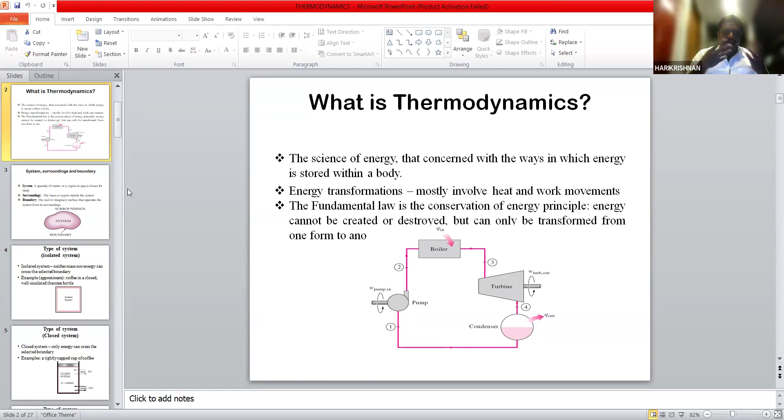The next thing I taught you last class is system, surrounding, and boundary. When studying a thermodynamic problem, the first thing you have to know is the system, which is the quantity of matter chosen for study. Outside the system is known as surroundings, and the system and surrounding are separated by an imaginary surface which is known as the boundary. It can be real or imaginary. This is what we studied about system, surroundings, and boundary.

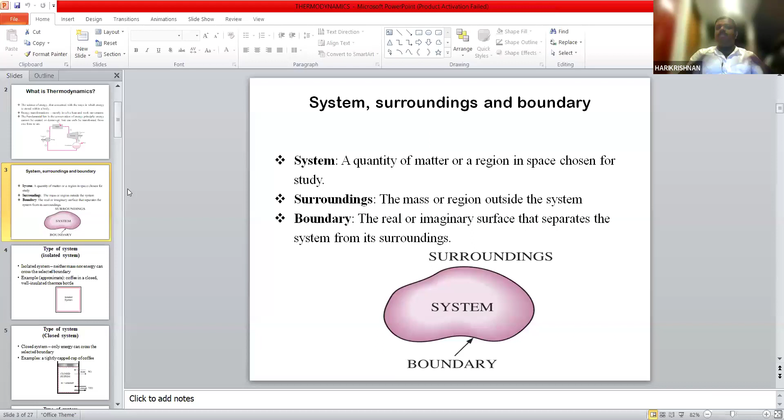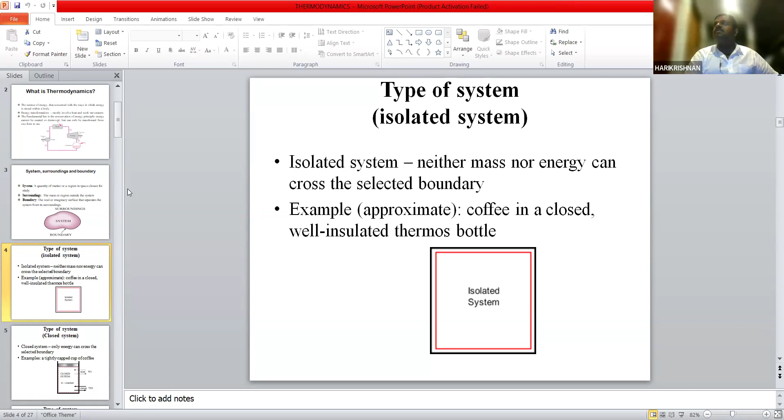Then we studied that an isolated system will not transfer any mass or energy to the atmosphere around the body. That type of system is known as isolated system. For example, a thermoflask is an example of an isolated system.

Then the next is closed system. In a closed system, energy can cross the selected boundary. For example, if you are keeping coffee in a tightly capped cup, what happens? Energy will cross the boundary. The amount of coffee will stay the same, but the hotness of the coffee may reduce over time. That is known as a closed system.

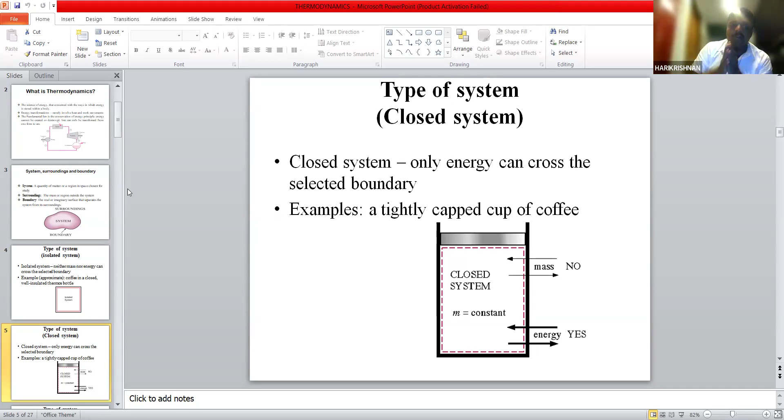But in an isolated system, that will not happen. Whatever heat and energy is there, it will remain in the system itself. That type of system is known as isolated system. Closed system means energy can cross the selected boundary. Open system means both energy and mass transfer will happen. These are the basic things we studied in the last class.

Then we studied the properties of the system. The properties are classified into two types: intensive property and extensive property. Properties which are independent of the mass are known as intensive property, and those which vary directly with mass are known as extensive property. Examples of intensive property are temperature, pressure, and density. Examples of extensive property, which vary directly with mass, are mass, volume, energy, and enthalpy. These are the things we discussed in the last class.

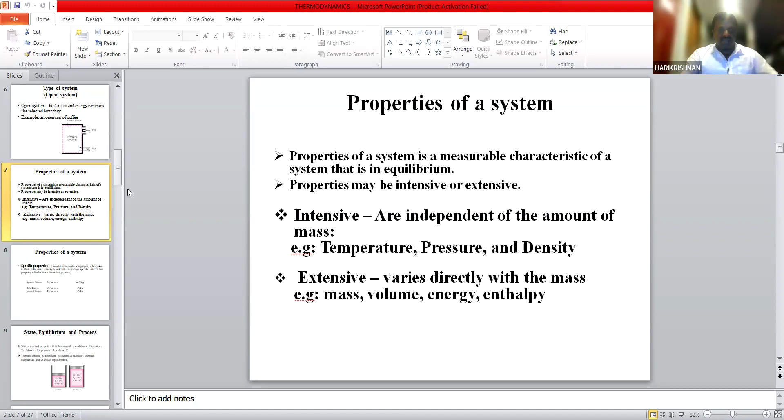Then we moved on to specific properties. Specific property means the ratio of any extensive property of a system to its mass gives you the specific property.

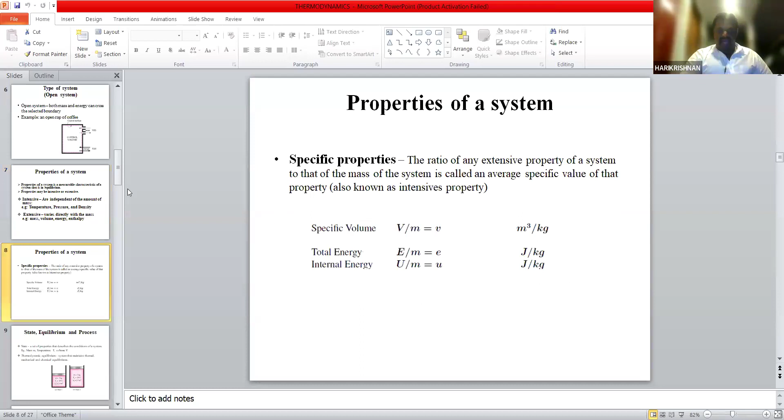State, equilibrium, and process - that is what equilibrium means. I have told you in the last class, there are three types of equilibrium: thermal, mechanical, and chemical. A body is in equilibrium only when it obeys all three of these equilibrium conditions.

Mechanical equilibrium means when a system is in equilibrium, it will not apply or have any external force acting on it. Chemical equilibrium means there will not be any chemical reaction happening. Thermal equilibrium means there will not be any temperature change. So a system in equilibrium must satisfy all three: thermal, chemical, and mechanical equilibrium.

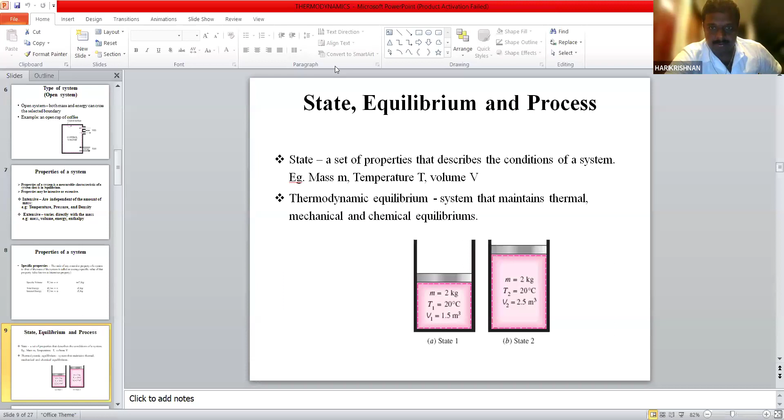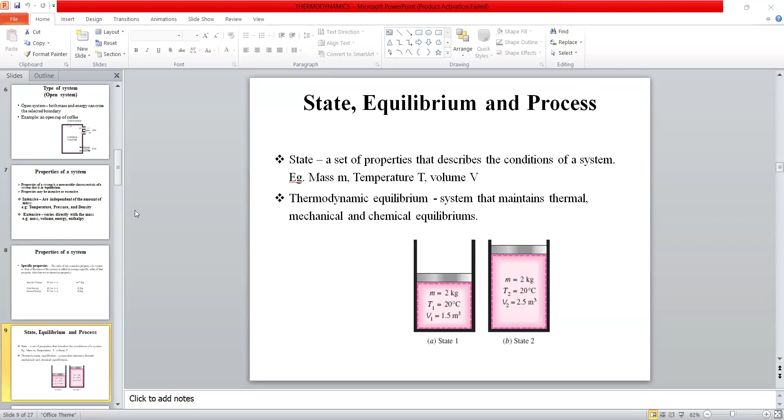Then we studied types of thermodynamic process. One is cyclic process - when a system starts from an initial state, undergoes various processes, and finally returns to its initial state, that process is known as cyclic process. For example, if it starts from state 1, passes through different processes like 1 to 2, and again comes back to 1 where the process stops, that type of process is known as cyclic process.

Reversible process means any process which can be reversed - that type of system is known as reversible process. Irreversible process means we cannot reverse a process; it will happen only on one side and we cannot reverse it. That type of process is known as irreversible process.

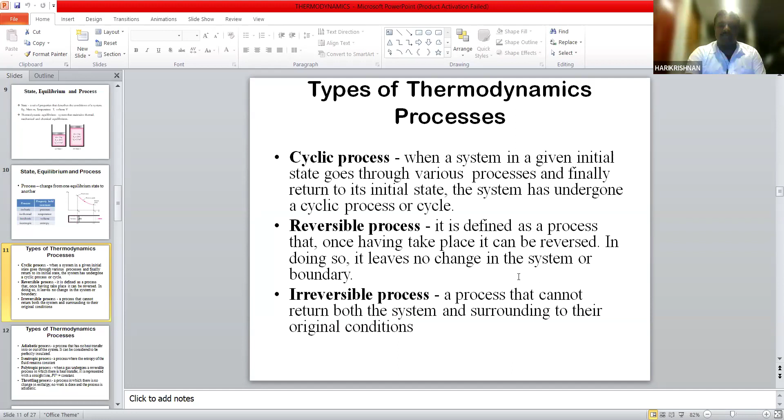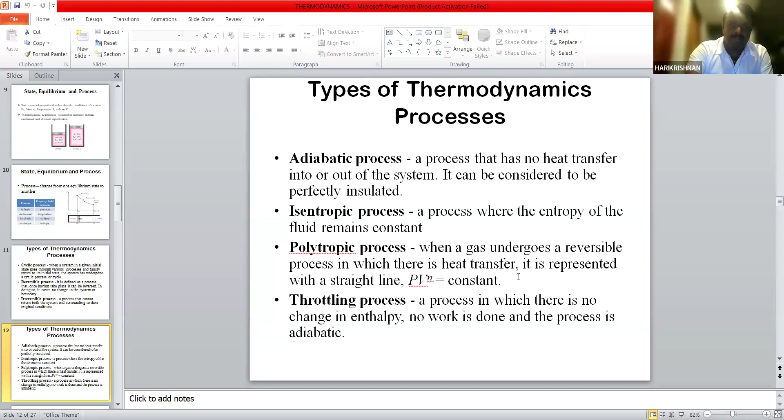Then we have studied process, and thermodynamic equilibrium I already explained. Then the next thing you have studied is the laws of thermodynamics. In the last class I explained up to the first law of thermodynamics.

So let me tell you what I mean by zeroth law. Zeroth law is the basic law of thermodynamics whose application is used to find the temperature - the thermometer is an example for the zeroth law of thermodynamics. The law states that when two bodies are each in thermal equilibrium with a third body, they also remain in thermal equilibrium with each other.

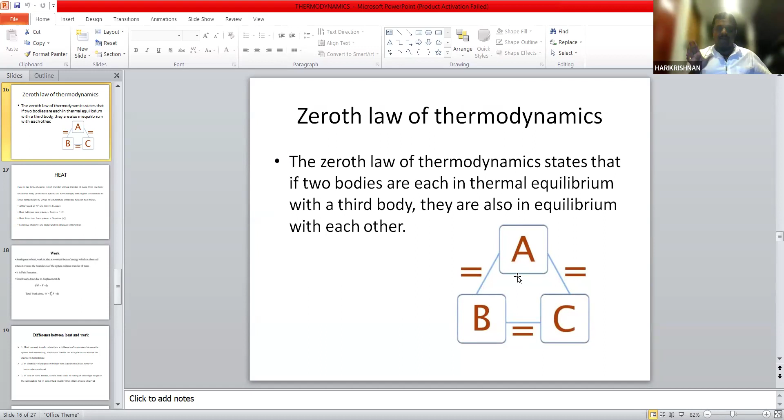For example, A and B are in thermal equilibrium, then B and C are in thermal equilibrium, then A and C will be in thermal equilibrium. This was the basics for temperature measurement - the zeroth law of thermodynamics gives the basic idea for measurement of temperature. This we studied in the last class.

Then first law of thermodynamics. Basically the first law states energy conservation - that energy can neither be created nor destroyed, but it can be changed from one form to another. That was the basics of the first law of thermodynamics, also known as the law of conservation of energy.

We can see that when it is applied to a cyclic process, the cyclic integral of delta Q minus delta W is equal to 0, which gives the idea of the first law of thermodynamics. Up to this we studied in the last class - that is the first law of thermodynamics.

Now today we are going to study that thermodynamics has two more laws - one is the second law of thermodynamics and another is the third law of thermodynamics. The second law of thermodynamics has two statements: one is the Kelvin-Planck statement and another is the Clausius statement. The specialty of this second law is that heat engines, for example, work with the help of it - for example the Carnot cycle. Every cycle we study is based on the second law of thermodynamics.

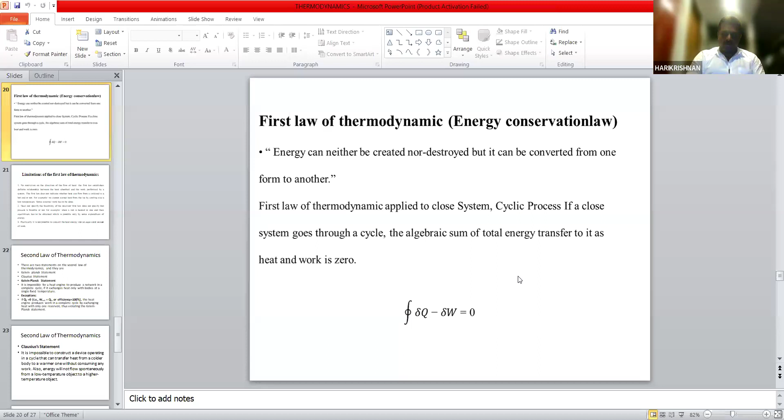So we will be starting from the second law of thermodynamics. There are two statements: one is the Kelvin-Planck statement and another is the Clausius statement. I will read this statement, and after that I have got another PPT through which I will explain all these things.

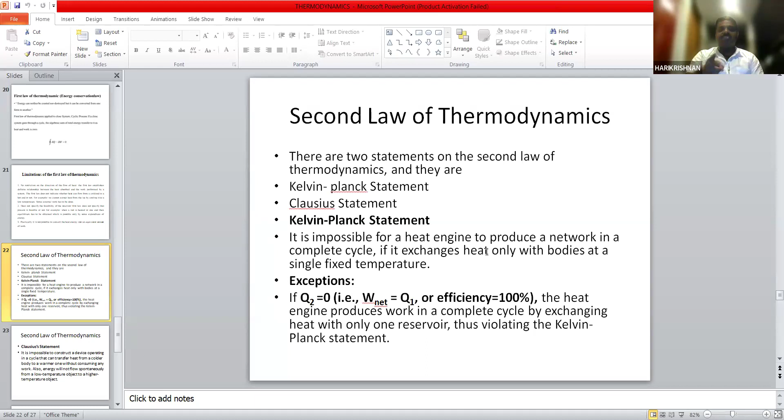The first statement is that it is impossible for a heat engine to produce net work in a complete cycle if it exchanges heat only with bodies at a single fixed temperature. That means the simple basic idea is that for an engine to work, it has got two temperatures - that is the basics of this Kelvin-Planck statement, which I will explain.

I will explain everything. Next is the Clausius statement. The Clausius statement states that it is impossible to construct a device operating in a cycle that can transfer heat from a colder body to a warmer one without consuming any work.

Energy will not flow spontaneously from a low temperature object to a higher temperature object. That means we cannot transfer energy from a low temperature reservoir to a high temperature reservoir unless we apply some work. For example, energy can transfer from a high temperature body to a low temperature body without any application of work, because of the temperature difference. But to transfer energy from low temperature to higher temperature, we cannot do that without applying work.

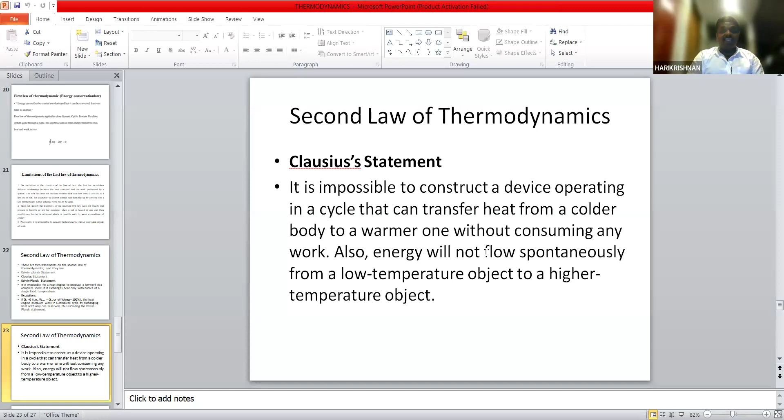This is the basics of the Clausius statement. So these are the two statements. Now I may be using some other PPT for explaining all these things: what is the second law, what do you mean by Clausius statement, Kelvin-Planck statement, and what is the functionality of all these. Let me close this PPT first.

Now another PPT is visible to you. So the zeroth and first law are very simple to explain. The zeroth law states that if there are three bodies, and 1 and 2 are in thermal equilibrium, and 2 and 3 are in thermal equilibrium, then 1 and 3 will also be in thermal equilibrium. Also, the first law of thermodynamics is the law of conservation of energy. These are two very simple statements.

But when it comes to the second law of thermodynamics, there are some more aspects we are explaining with the help of these two laws. The first thing is that it identifies the direction of a process. That is the first important thing in the second law of thermodynamics.

For example, heat: what happens if you keep a hot tea open to the atmosphere? Heat will transfer from the hot tea to the atmosphere. Why does this happen? It happens spontaneously, because there is a temperature difference. So heat will spontaneously transfer from a hot object to a cold object. But if there is no temperature difference, the vice versa is very difficult—it is very difficult to transfer heat from a cold object to a hot object without the application of work.

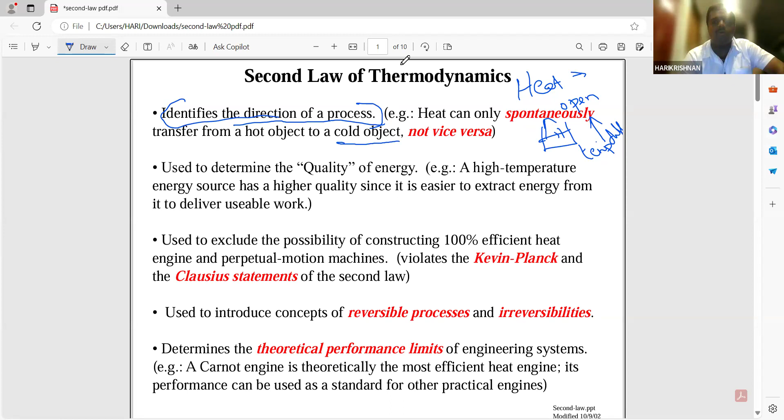That is what is meant by identifying the direction of a process: heat can spontaneously transfer from a hot body to a cold body because of the temperature difference. That is the first importance of the second law of thermodynamics.

Next, the second law is used to determine the quality of energy. Quality means: if an energy source has a high temperature, it is said to have higher quality, because it is easier to extract energy from it and deliver it as useful work. A high temperature energy source has high quality, so it's easier to extract and convert that energy into useful work.

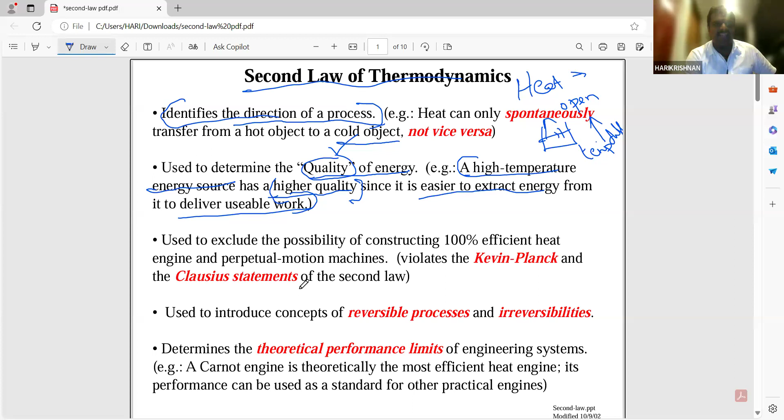Then next is the possibility of constructing a 100% efficient heat engine and perpetual motion machines. I have already told you about the Kelvin-Planck and Clausius statements. So what is the specialty of a 100% efficient engine? You may know it—it will have no losses.

But when you consider your vehicle, for example your bike, what is the specialty of this bike? It has so many moving mechanical parts. We also provide lubrication—why? Lubrication is provided to reduce friction. So what does that mean? There is already a friction aspect in the engine. Friction means whatever work or energy we give will not be fully converted into work; some will be lost due to friction. So it means it will not be possible to construct a 100% efficient engine.

We are saying that Carnot is a 100% efficient engine, but it is not possible because losses are there. That is what the third point explains: used to exclude the possibility of constructing a 100% efficient heat engine and perpetual motion machine.

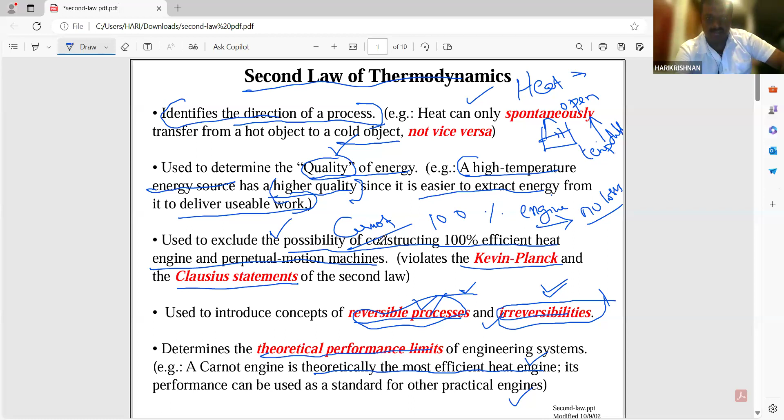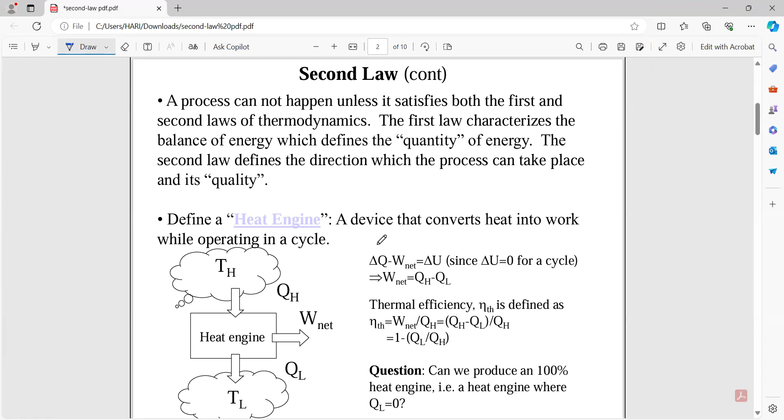Next is second law, the continuation. So you may see this figure. This is a heat engine. There is TH and there is TL. What is TH? Hot body, and TL is the cold body.

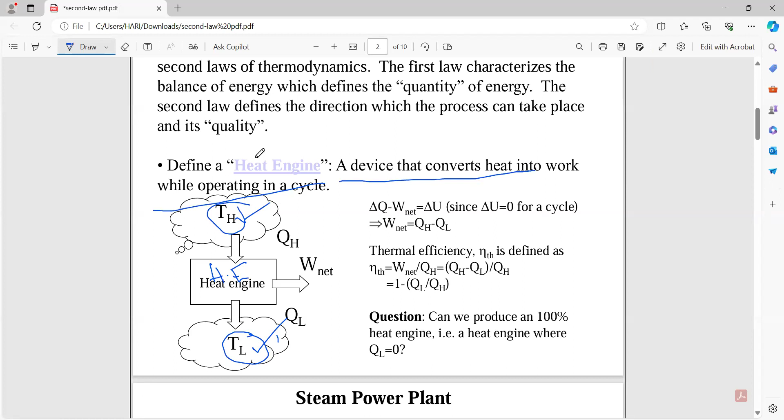The device that converts heat into work while operating in a cycle is known as a heat engine. What is the specialty of a heat engine? It is a device which converts heat into work while operating in a cycle. That is known as heat engine.

You can see over here, this is the hot body and this is the cold body. So the heat engine is doing work. That work is termed as W net. W net is QH, heat from the hot body, minus QL, heat to the cold body. That is W net, which is work done.

So work done: there is heat transfer QH to the system, and there is a heat loss from the system, that is QL. If this is a hot body and this is a cold body, there will be heat transfer from the hot body to the cold body. So from the hot body QH heat is transferred, and QL heat is transferred out. So work done is QH minus QL.

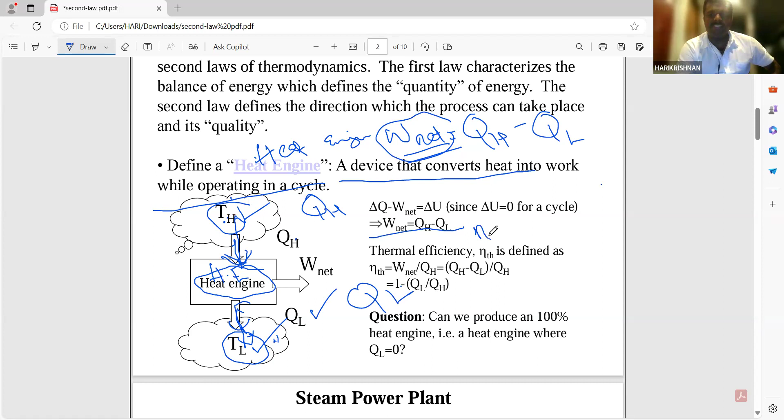So what will be the efficiency of the system? Work done, net work, divided by heat extracted, QH. What is work done? QH minus QL divided by QH. So when you divide it, you get 1 minus QL divided by QH. This is the efficiency.

So this is about the heat engine. You have to understand that in a heat engine, there is a hot body and below there is a cold body, with an engine connected in between. From the hot body, QH will be extracted and some work will be done by the heat engine, known as W net. After that work, heat goes to the cold body, that is QL.

So the net work done is QH minus QL. Efficiency is W net divided by heat extracted, that is QH. Using the W net equation, QH minus QL divided by QH, the efficiency is 1 minus QL divided by QH.

So we cannot produce a 100% efficient engine, as I told you in the beginning. Why? Because there will be heat losses in the system, heat losses or energy losses. This happens because of friction and other complications in the moving parts.

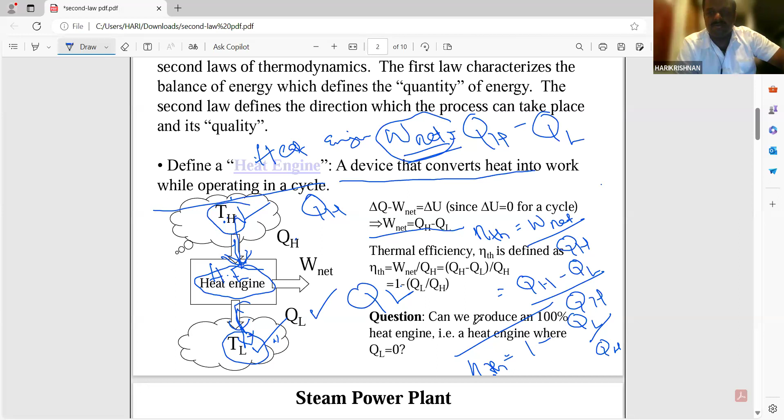Is it clear for you? I think this much is clear. Yes sir, yes. Okay. In doubt? Any questions? No sir, no. Okay, thank you.

So when we come to the power plant, we have already discussed heat engines. For a heat engine, the best example is a steam power plant. What is the specialty of a steam power plant? Actually, the main specialty is that it will be producing steam. What is the specialty of a steam power plant?

It will be producing steam. Then what is the reason for this heat engine? What is the working fluid in the steam power plant? Anybody, can you say? Some of you will be working in a steam power plant, so what will be the working fluid? It will be water. This water will be converted into steam when it undergoes some thermodynamic cycle. This steam power plant is a good example of heat engine where the working fluid is water, which undergoes a thermodynamic cycle.

In the last session itself, we have told you W net is equal to W out minus W in, also Q in minus Q out. That means, I will explain how it is coming.

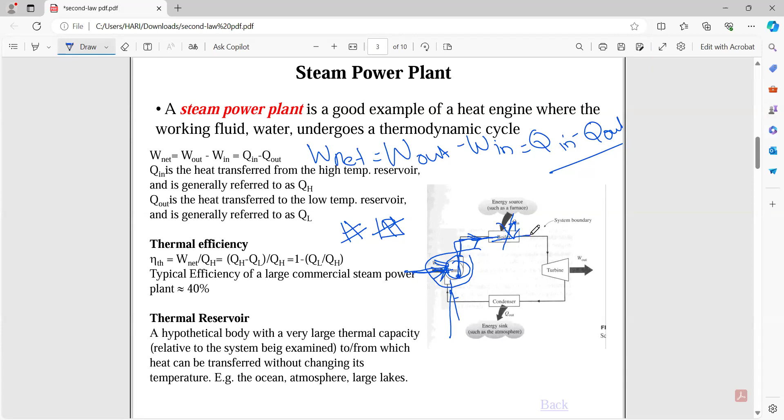In boiler, we will be applying heat. When we apply heat, the water will become steam. Is it clear? I think it's clear. So, after the steam is produced, the steam is used, turbine will be working, and this W...

Okay, sorry, there is rain over here. That is what, there is some issue. Sorry for that. The power is fluctuating due to rain.

So this is the working of a steam power plant. I think it's clear for you.

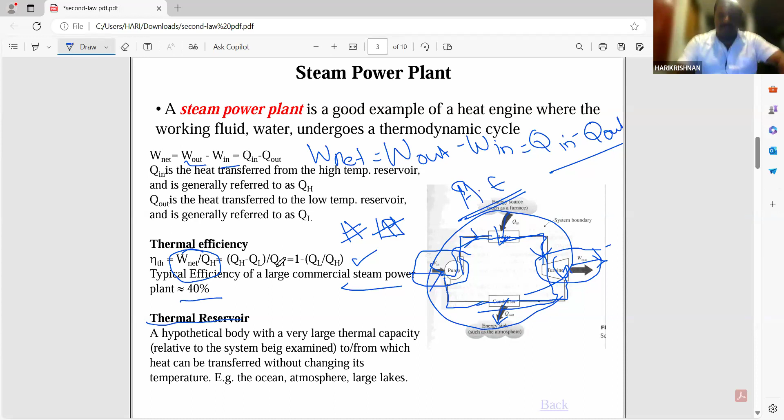Next, in the starting of the section, I have explained Kelvin Planck statement, but now you have got some idea about this heat engine, etc. Now I will be giving you what is Kelvin Planck statement.

It is impossible for any device that operates on a cycle to receive heat from a single reservoir and produce net work. For example, when we see a steam engine, there was a pump, a boiler, then a turbine, and again a condenser, again a pump. So if it is impossible for any device that operates on a cycle to receive heat from a single reservoir, here we are having different reservoirs, then only what happens - there is work. That is what the second law of thermodynamics, or the Kelvin Planck statement, is all about.

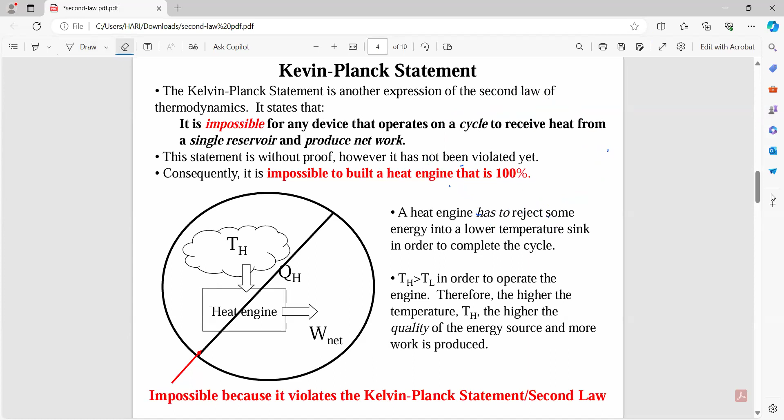So this statement is without proof. However, it has not been violated yet because it is impossible to build a heat engine that is 100% efficient. For example, what they have done is, there is a heat engine over here, you can see. We are applying, this is a hot body, and we are applying a Q to the heat engine. If total W net, whatever Q we supplied, it will be transferred to work, then it violates which law? Kelvin Planck statement.

Kelvin Planck statement says that if there is a hot body and you are transferring heat or energy to this heat engine, some will be transferred to work and some energy will be liberated to atmosphere or cold body, whatever it may be. So it will not be possible to work with a single engine or a single reservoir. There will be more reservoirs for energy transfer to happen. That means it is impossible to build a heat engine that is 100% efficient. That is the proof of Kelvin Planck statement.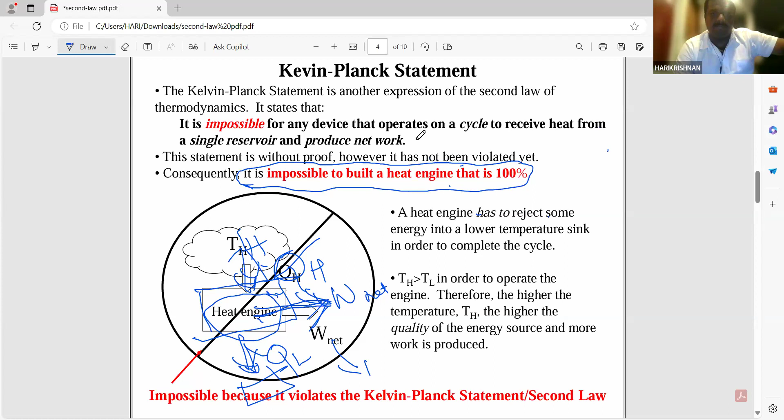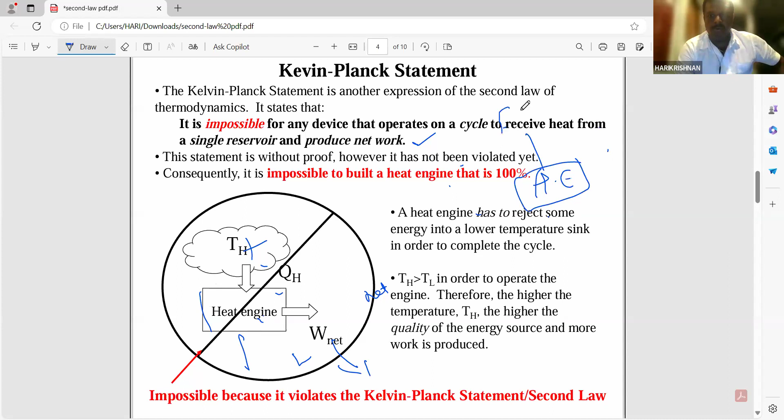So if we are having a heat engine, for example, if it is connected to a hot body here and this is cold body, then Q will be liberated from the hot body and some work will be done by the heat engine and some heat will be liberated to the cold body. This is the procedure of a heat engine. If this cold body is not there, it will become 100% efficient, but it is not possible. I think it's clear, Kelvin Planck statement.

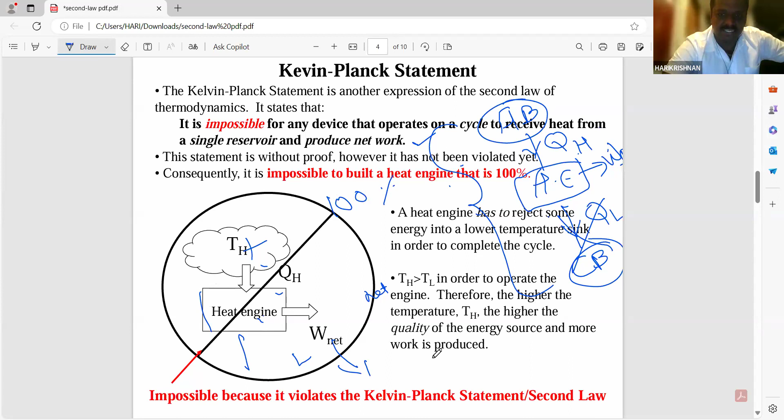Next is heat pump and refrigerator. These are the basic devices for heat transfer. What is the function of a heat pump? Heat pump is defined as a device that transfers heat from a lower temperature source to a higher temperature one. That is the specialty of heat pump. For example, heat pumps are used to extract energy from outside cold outdoor air into warm indoors.

But a refrigerator performs the same function. The difference between the two is that the heat transfer needs to be optimized. In a refrigerator, it will be cooling the air, that is the function of a refrigerator. But a heat pump will be heating the room. For example, when we use a heat pump in a room, it will be heating the room, while a refrigerator will be cooling the room. So both refrigerator and heat pump are examples of heat transfer devices, an application of the second law of thermodynamics. I think it's clear for you.

Next is heat pump or refrigerator. The specialty is that we have to do some work on the system, then only it will function. For example, if we are extracting heat from a cold body, we will be doing some work on it, then only it will be transferred to the hot body.

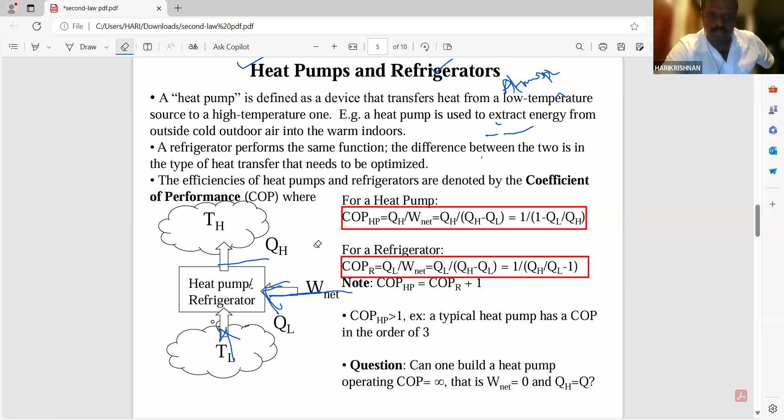So this refrigerator and heat pump relate to the Clausius statement. What do you mean by Clausius statement? It is impossible to construct a device that operates in a cycle and produces no effect other than transfer of heat from a lower temperature body to a higher temperature body. That means without the application of any work, we cannot transfer heat from a cold body to a hot body. But we can transfer heat from hot body to cold body directly, because of temperature difference. But we cannot transfer heat from a cold body to a hot body without any external work. That is the statement of Clausius.

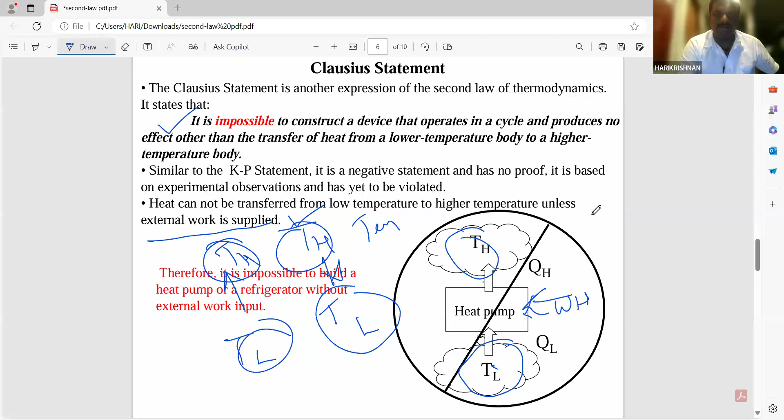Heat cannot transfer from a low temperature to a higher temperature unless external work is supplied. Whatever heat is there, if it is to be transferred from a low temperature body to a higher temperature body, some external work has to be applied. If you are building a refrigerator or heat pump, we have to give some external work input. Then only this refrigerator or heat pump will work; otherwise it will not work.

That is what Clausius statement gives you. Clausius statement states that it is impossible to construct a device that operates in a cycle and produces no effect other than transfer of heat from a lower temperature body to a higher temperature body. You have to be very specific with the statement.

So if you have to transfer heat from a lower temperature body to a higher temperature body, there should be some work input. This is the example of heat pump, refrigerator, etc. For a heat pump or refrigerator, we have to apply some external work; then only this will function. So the statement is that it is impossible to construct a device that operates in a cycle and produces no effect other than transfer of heat from a lower temperature body to a higher temperature body. Heat cannot transfer from a lower temperature to a higher temperature body unless external work is applied. That is the meaning of this statement.

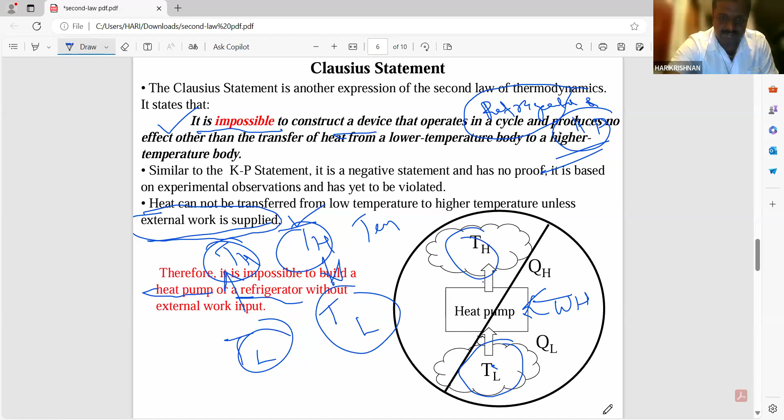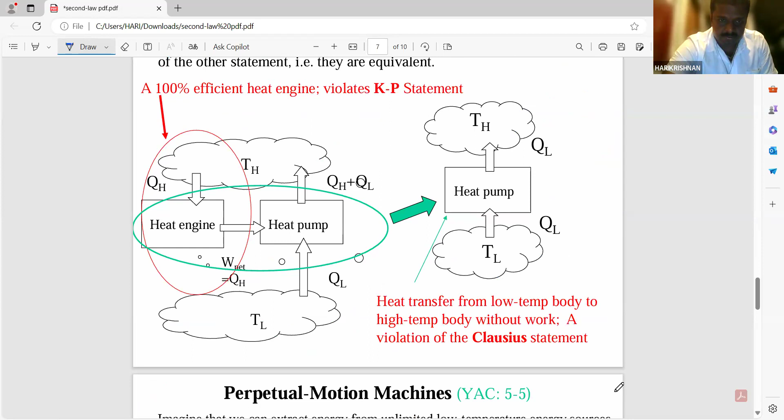Now, equivalency of the two statements: this means that if we violate any one of the statements, it will lead to violation of the other statement. So they are both equivalent. That means if, without the application of any external work, you are transferring heat from a cold body to a hot body, that is the violation of which statement? Clausius's statement. So if we violate this statement, it will automatically violate Kelvin-Planck's statement.

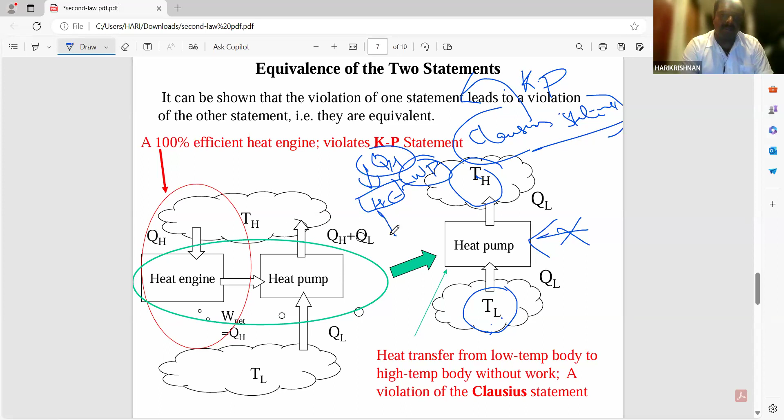What is Kelvin-Planck's statement? If you are having a single reservoir and whatever heat we are supplying is converted into work, it will not be possible; there will be some losses. If we violate this Kelvin-Planck statement, the engine will be 100% efficient, which is not possible. So, heat transfer from a lower temperature body to a higher temperature body without work is the violation of Clausius's statement. If you violate Clausius's statement, it will automatically violate Kelvin-Planck's statement, and if you violate Kelvin-Planck's statement, it will automatically violate Clausius's statement.

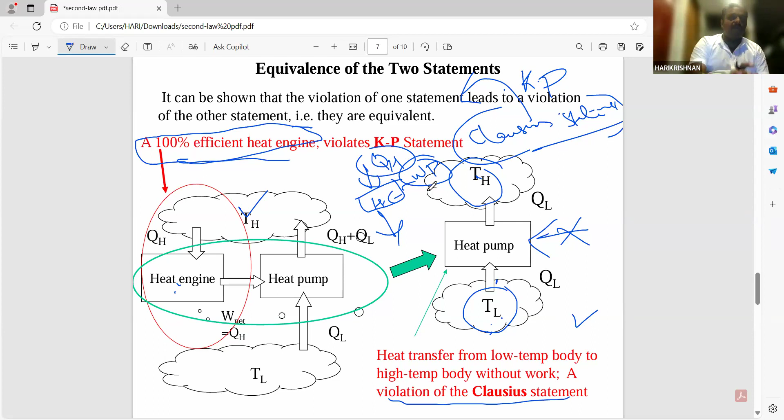So I have to be specific with these two statements. If you violate Kelvin-Planck's statement, it will automatically violate Clausius's statement, and if you violate Clausius's statement, it will automatically violate Kelvin-Planck's statement.

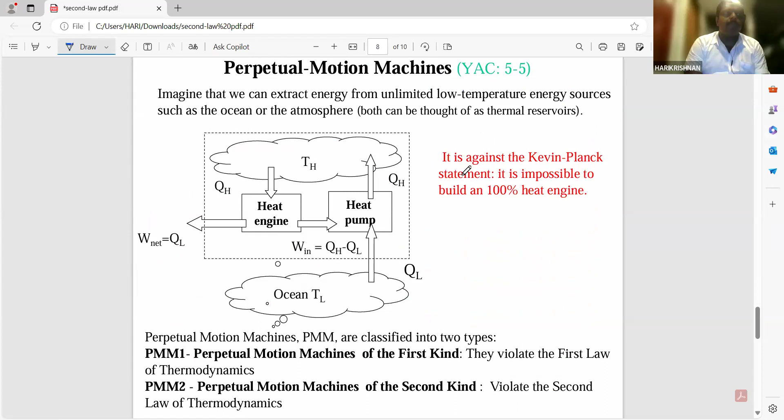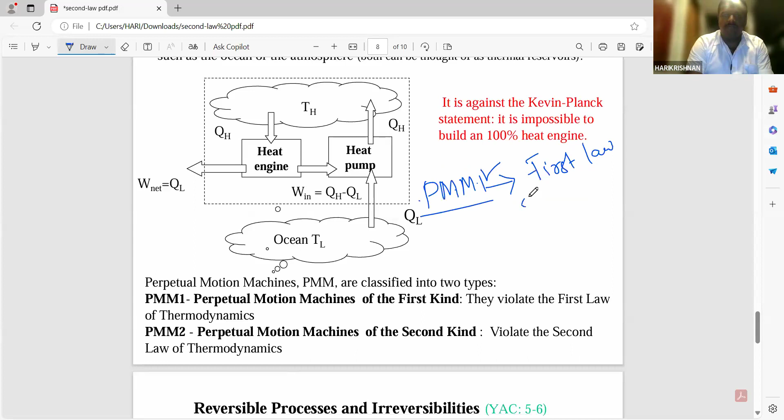Now, perpetual motion machines: I think this is not possible. PMM1 is the perpetual motion machine of the first kind. This means if you violate the first law of thermodynamics, that type of machine is known as a perpetual motion machine. The first law states: energy can neither be created nor destroyed, but it can be transferred from one form to another.

That is PMM1. What is PMM2? PMM2 means when we violate the second law of thermodynamics, it becomes PMM2 — the perpetual motion machine of the second kind. But this is also not possible. So PMM1 is the violation of the first law of thermodynamics, and PMM2 is the violation of the second law of thermodynamics. You may understand that PMM1 and PMM2 are not possible, because energy can neither be created nor destroyed, but it can be transferred from one form to another.

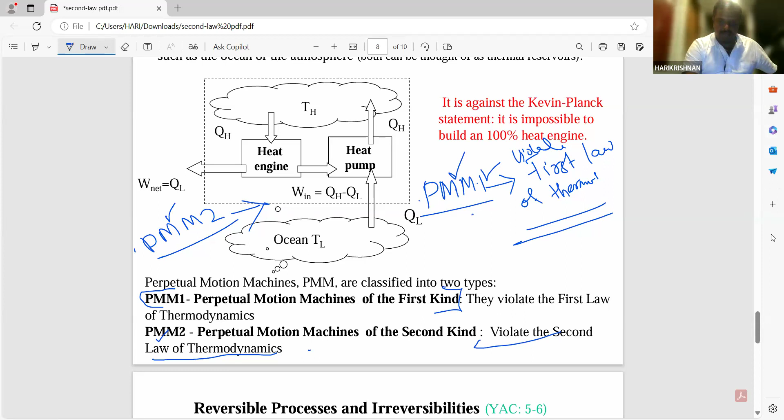Similarly, we have told you that if there should be some heat transfer from a cold body to a hot body, we have to apply some work. I think it's clear now.

Yes, sir. Yes, sir. Clear. Yes, yes, it is clear.

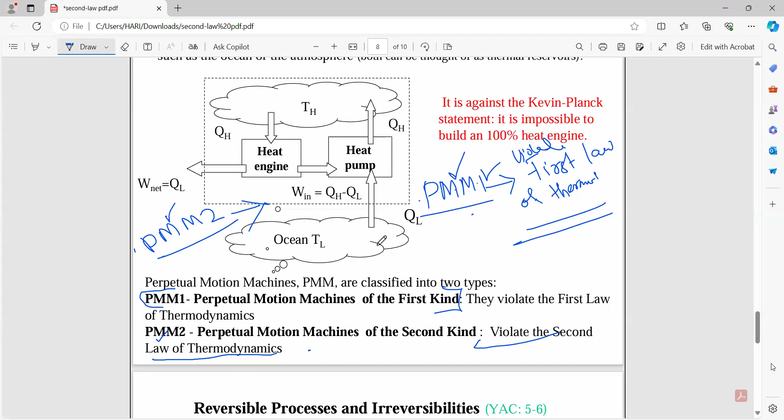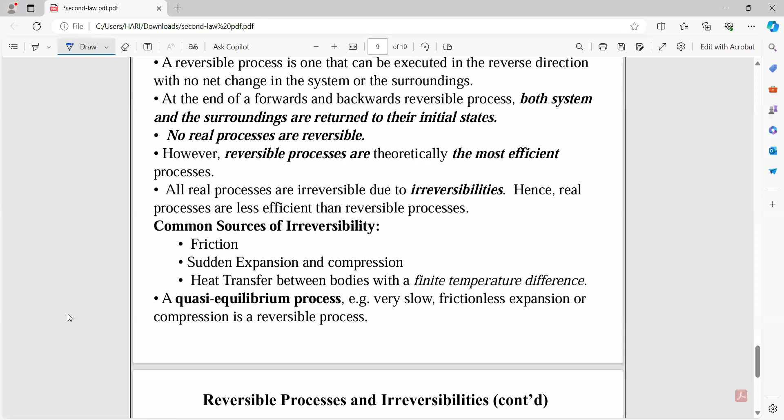So next is reversible and irreversible process. A reversible process is one that can be executed in the reverse direction with no net change in the system or surroundings. Actually, you have to understand one thing: no real processes are reversible because there will be some frictional changes or losses happening in the system. So whatever we see theoretically, only we can say it's a reversible process.

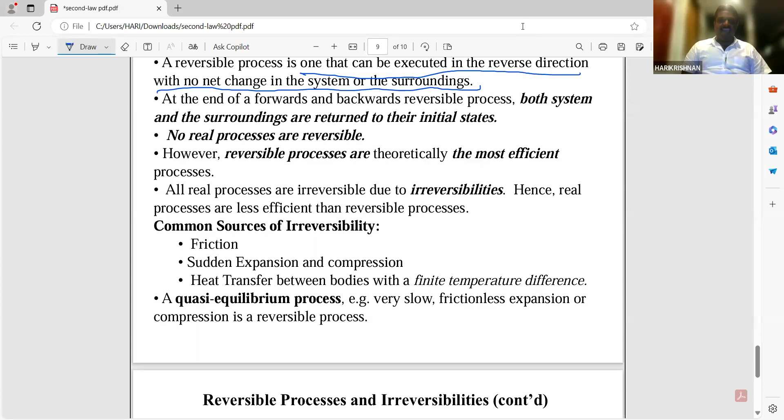Whatever process you actually see, it is not reversible. So why is a reversible process not possible? The main reasons are friction, sudden expansion and compression, and heat transfer between bodies with a finite temperature difference. These are the reasons why the system, the process, are not reversible.

So an example of a reversible process is the quasi-static process. That is the best example for a reversible process. You have to understand that a quasi-static process is an example for a reversible process. So quasi-static process means, for example, if you are having a system...

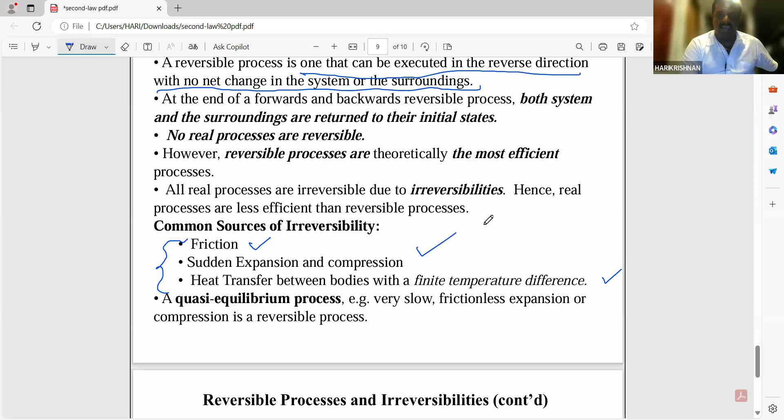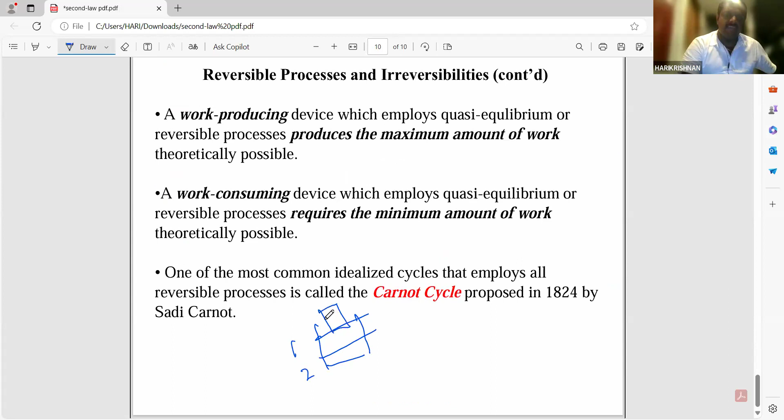I will draw here. If you are having a system, this is condition 1 and this is condition 2. If you are keeping a 10 kg weight at P1, it will go to P2. So if you draw a graph, this is P1 and this is P2, and you will get a graph like this, 1 to 2. At the first point the piston was at P1, and when we kept this 10 kg, the piston moved to condition 2.

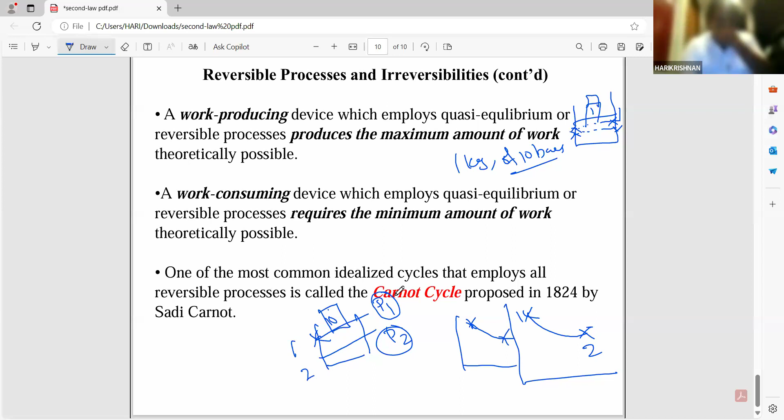So first we are having a piston, and this is point one. First we keep 1 kg, so it will move downward and become equilibrium. Then we keep the next one, so it will again move downward and become equilibrium. That means when this 10 kg was kept all at once, we instead divide it into 1 kg increments, 10 bars, and in each condition it approaches an equilibrium state.

So there will be many equilibrium states over here, say 10 equilibrium states. So what do you mean by quasi-static process? It is a process done in infinitely small steps. Whatever small step is possible, if you do that process in infinitely small steps, and in each step equilibrium is achieved, that type of process is known as a quasi-static process.

And the example for a reversible process is the quasi-static process. You have to understand that a quasi-static process is done in infinitely small steps, very very small steps. In each step, what is the specialty? It has to reach an equilibrium state, and only then will the next process happen.

So when it is moving from 1 to 2, we have different states in between, A, B, C, etc. When it reaches A, it becomes equilibrium, then only A to B happens, then B to C happens. Like that, every process is done in infinitely small steps, and in each step an equilibrium state is reached. That type of process is known as quasi-static process.

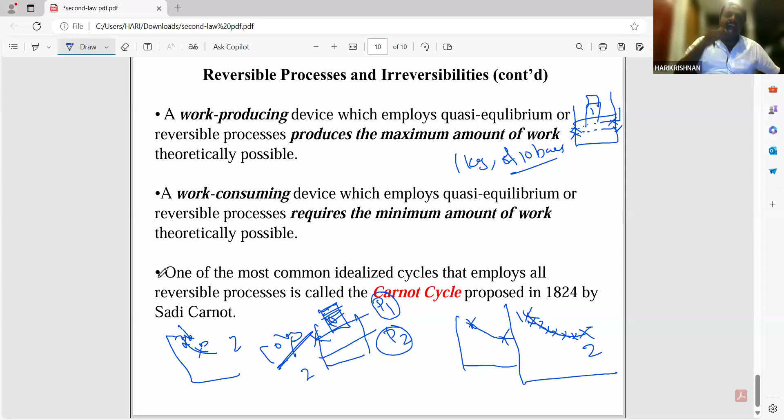So one of the ideal cycles which employs this reversible process is the Carnot cycle. This is also a theoretical cycle. In practical situations, we cannot have a Carnot cycle. I think it's clear for you, all the things.